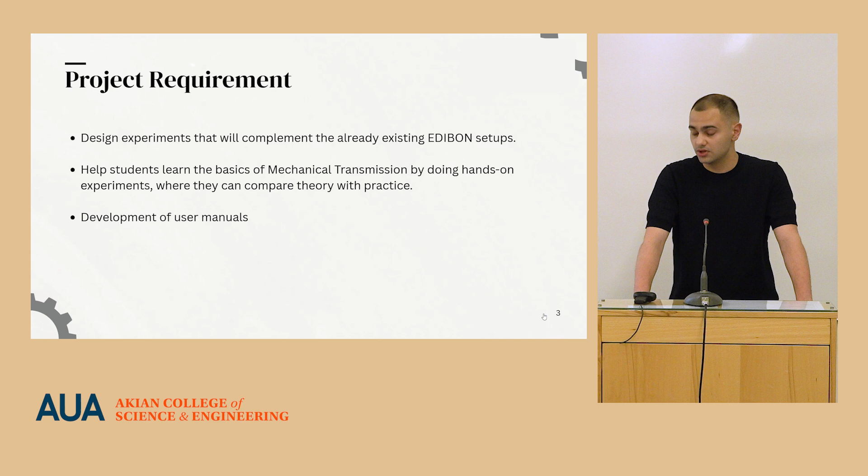The project requirement is to design experiments that will complement the already existing Edibon setup, help students learn the basics of mechanical transmission by doing hands-on experiments where they can compare theory with practice, and also develop user manuals to guide students.

So what is transmission? Mechanical transmission is a system that transfers power from an input source, changing its speed, direction, torque, or other things to meet mechanical needs. We are all familiar with them, and one of the best examples is the chain drive of a bicycle that everyone knows.

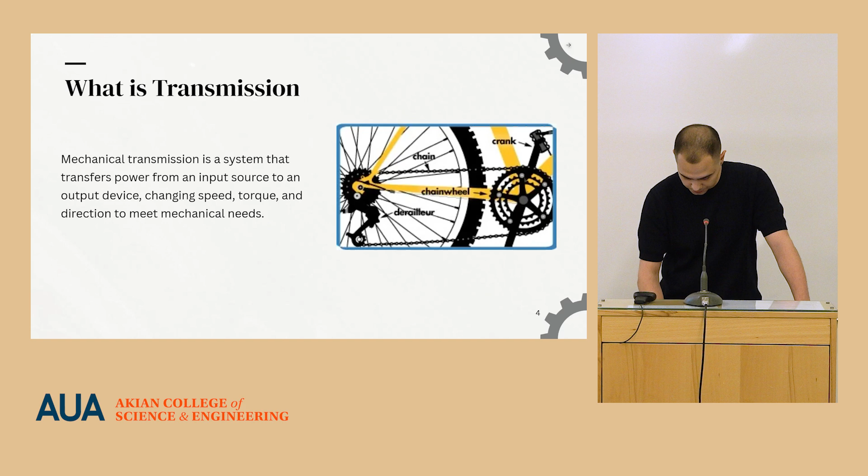Applications: mechanical transmissions are used everywhere, starting from bikes to cars to heavy industrial machinery.

Educational values: academic integration. These setups can be incorporated into different courses throughout the engineering curriculum to learn about every aspect of it. Then enhanced learning through implementation - students can use these designs in their courses to learn how they work, how to design them, not in theory but in practice, and also to prepare students for the rise of robotics.

As we have seen today in some exceptional presentations, the increase in robotics will require many transmission units, and also people who know how they work and how to design them.

Fundamental concepts: the most important ones are speed reduction, which shows by what factor the speed gets reduced, and mechanical advantage, which shows how much the input torque gets increased. In theory, both mechanical advantage and speed reduction are equal, meaning that if the speed gets reduced by a factor of 6, then the mechanical advantage, the input torque, will be multiplied by 6.

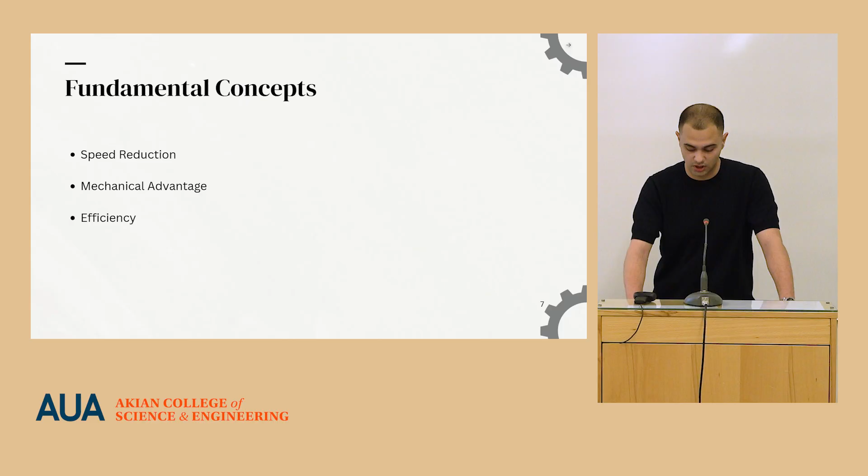But in real life, there are losses due to friction or misalignments, so it is not always the correct value. Efficiency shows how much of that input power actually goes to turning the output shaft rather than being lost in friction or misalignments.

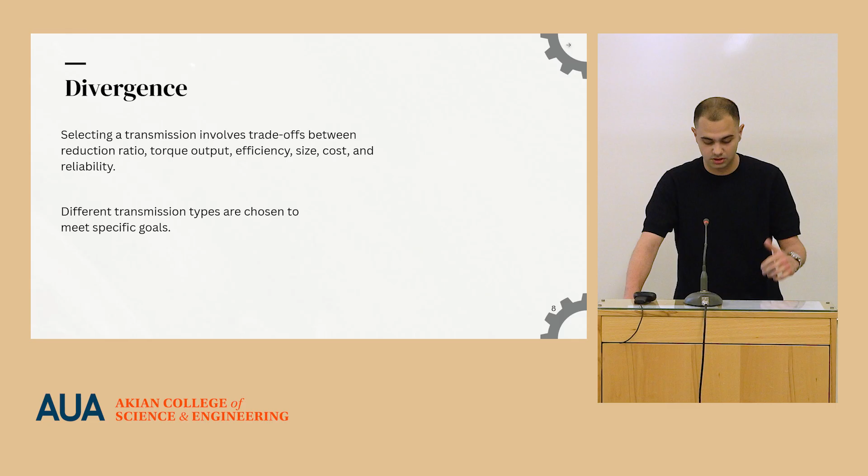Selecting transmission involves trade-offs between reduction ratio, torque output, efficiency, size, and etc., and different transmission units are used in different spaces to meet specific goals. A review of already existing setups from Edibon includes belt drive, chain drive, gears, bevel gears, worm drive, and universal transmissions. Now into the new setup.

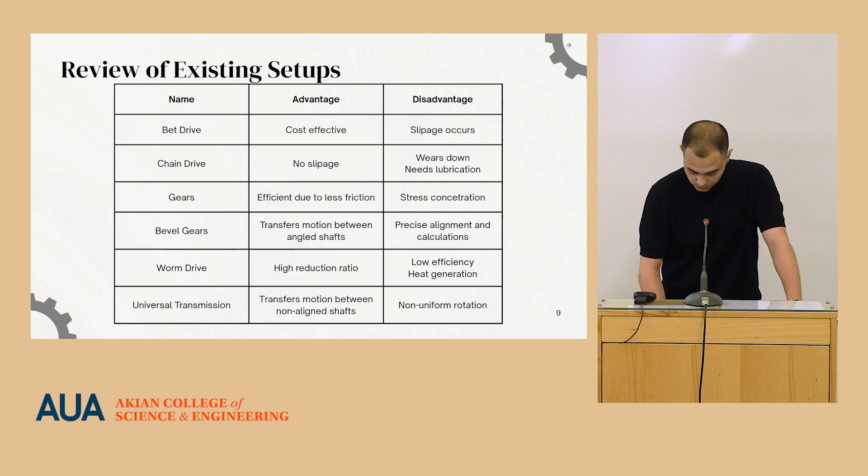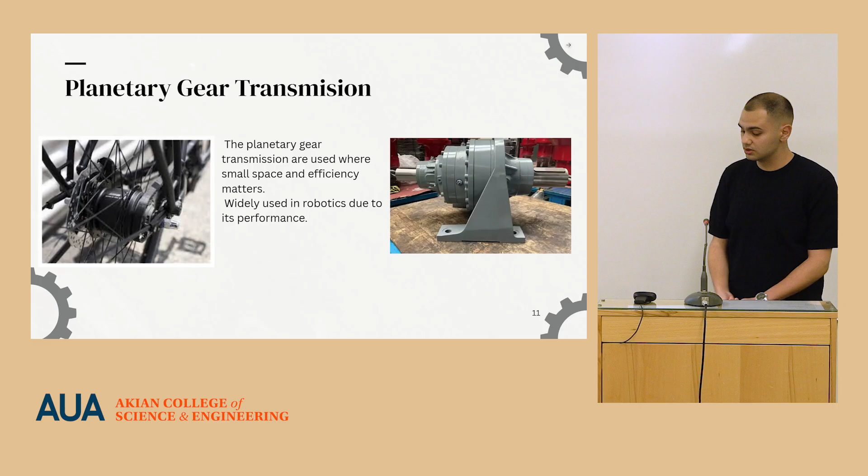The first setup is planetary gear transmission, used everywhere where small space and efficiency matter. On the left you can see a picture of a planetary gear transmission used in a bike, and the other picture is one used in a mining rig.

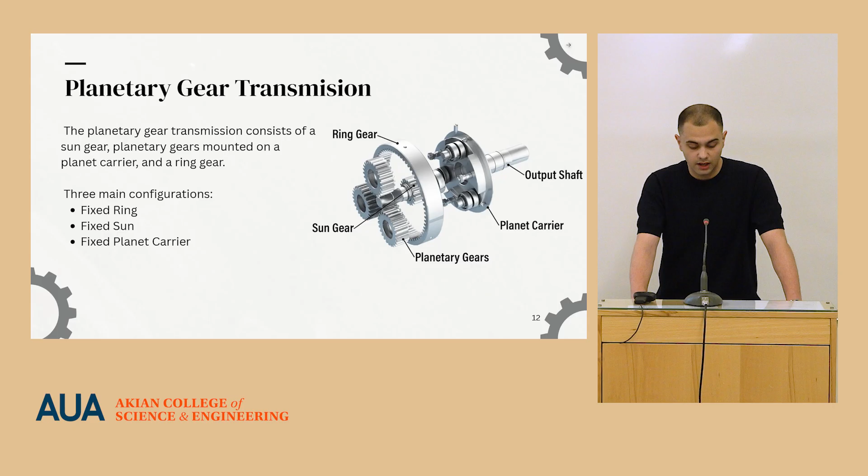They consist of a sun gear, planetary gears mounted on a planet carrier, and a ring gear. There are three main configurations: fixed ring, fixed sun, and fixed planet carrier. In my configuration, I used fixed ring - it's the most used one.

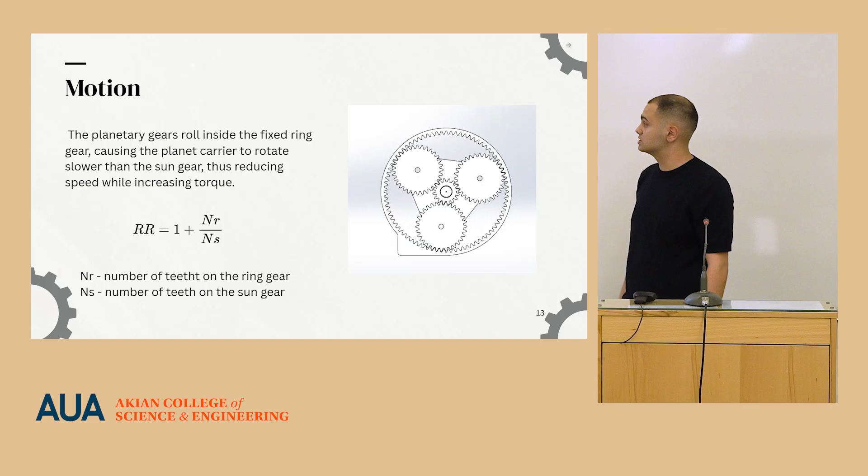Here you can see the motion of a planetary gear transmission. The planetary gears roll inside the fixed ring, causing the planet carrier to rotate slower than the sun gear. In the center, you can see the sun gear, which rotates around its axis. Then you can see three planet gears that not only revolve around their own axis but also around the sun gear - hence the names, sun as it is in the center, and planets as they revolve around it.

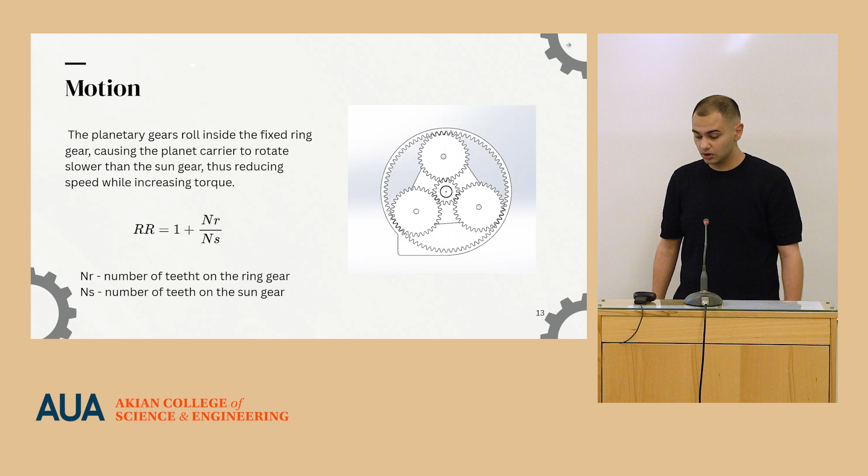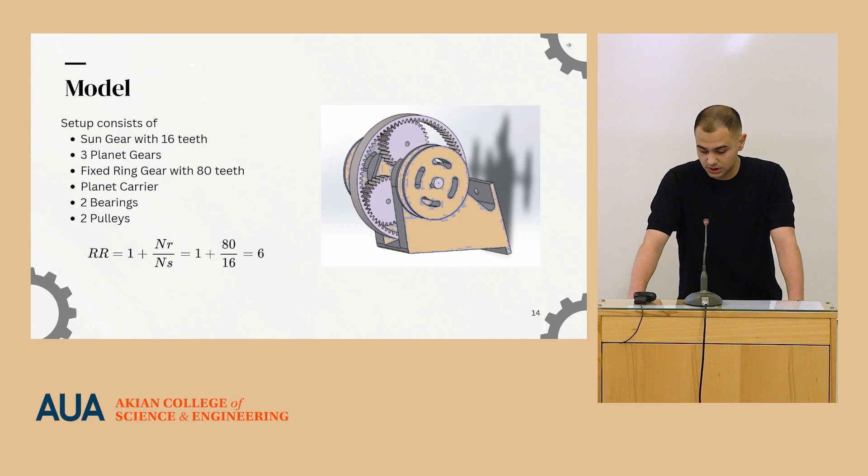There's also a formula for the reduction ratio. My model consists of a sun gear with 16 teeth, 3 planet gears, a fixed ring gear with 80 teeth, a planet carrier, 2 bearings, and 2 pulleys, giving a reduction ratio of 6.

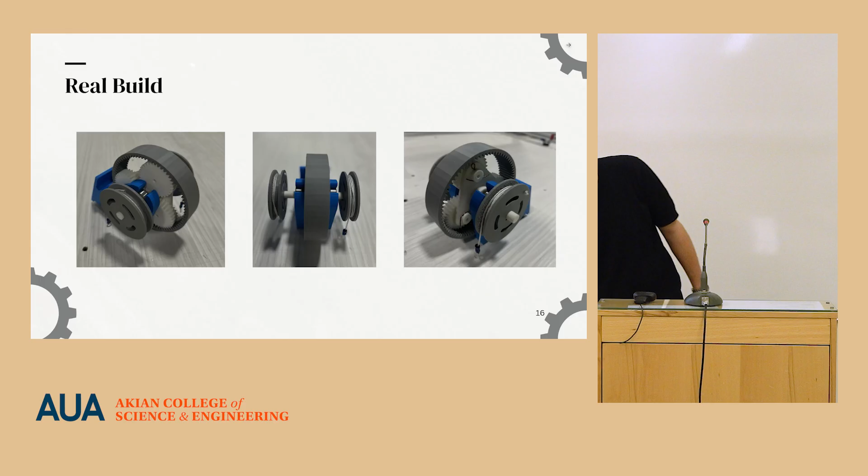So how does the experiment go? There are 2 experiments. The first is clarifying everything - calculating the reduction ratio with a formula, then rotating the input pulley and counting turns of the output pulley. If the reduction ratio is 6, the input pulley must rotate exactly 6 times for the output pulley to rotate exactly once. After clarification, the second experiment is done, which is calculating the efficiency of the planetary gear transmission.

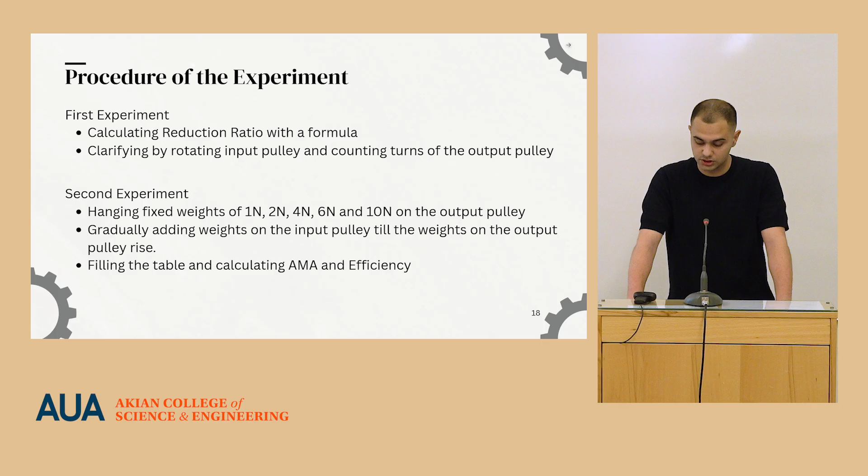This involves hanging fixed weights on the output pulley, then gradually adding weights on the input pulley until the weights on the output pulley rise, then filling in the table and calculating everything. This is how the experiment will go.

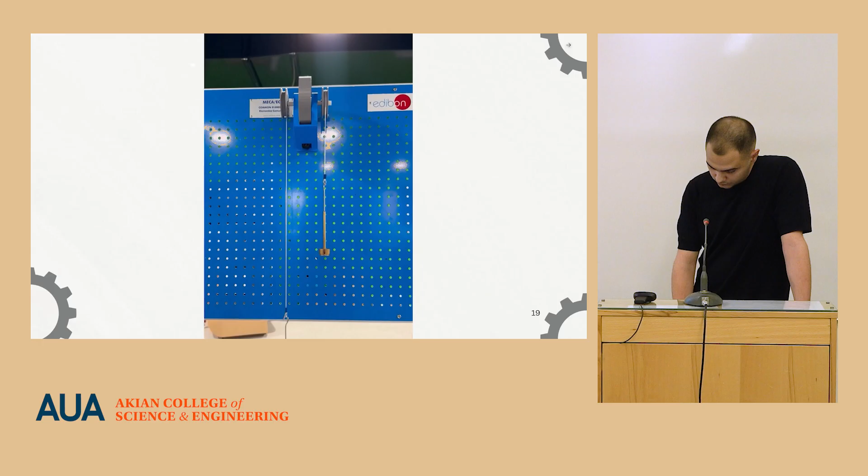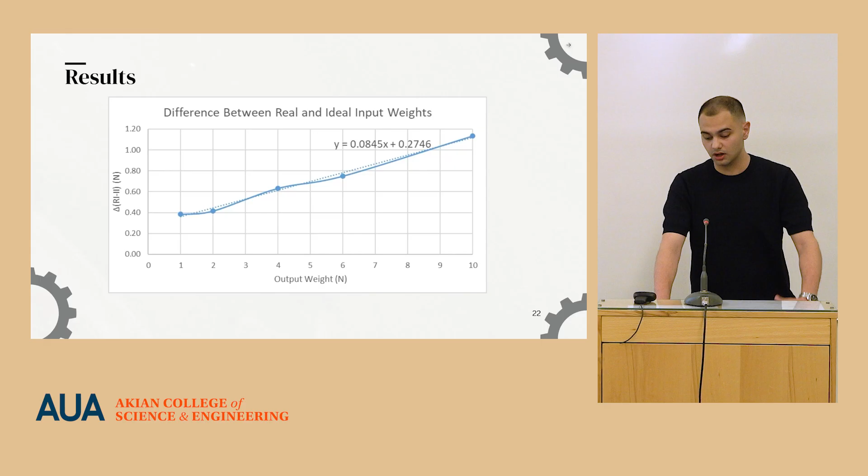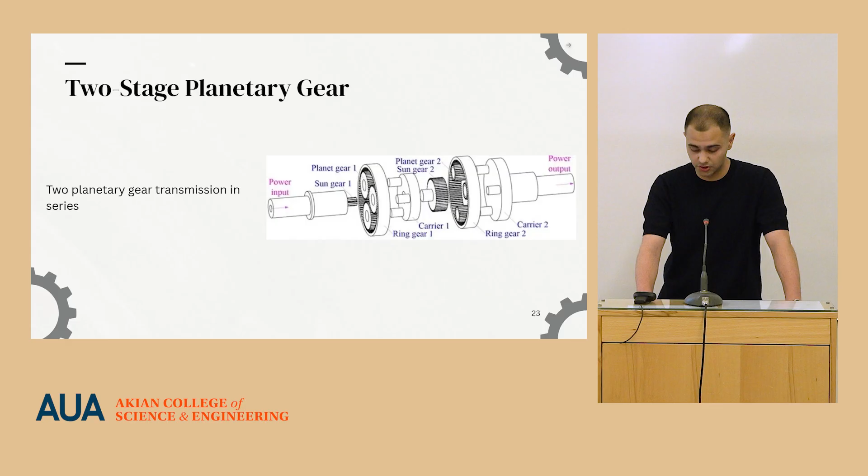But sometimes you don't need that much efficiency, you just require high reduction ratios, and this is achieved by 2-stage planetary gears, as you can see here. It is basically two planetary gear transmissions connected in series. There are two configurations: common ring, and one with separate rings, and the reduction ratio is just the multiplication of each stage.

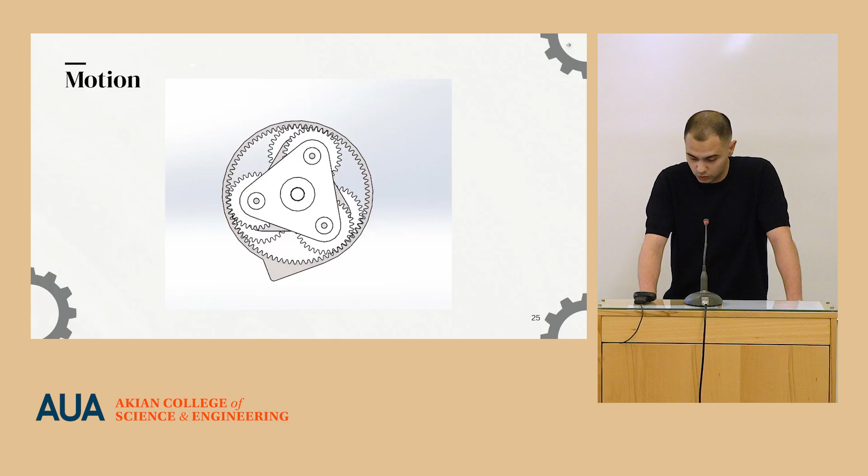Here you can see the motion of a 2-stage planetary gear transmission. At the back you can see relatively fast input, and at the front relatively slow output. And this is the design.

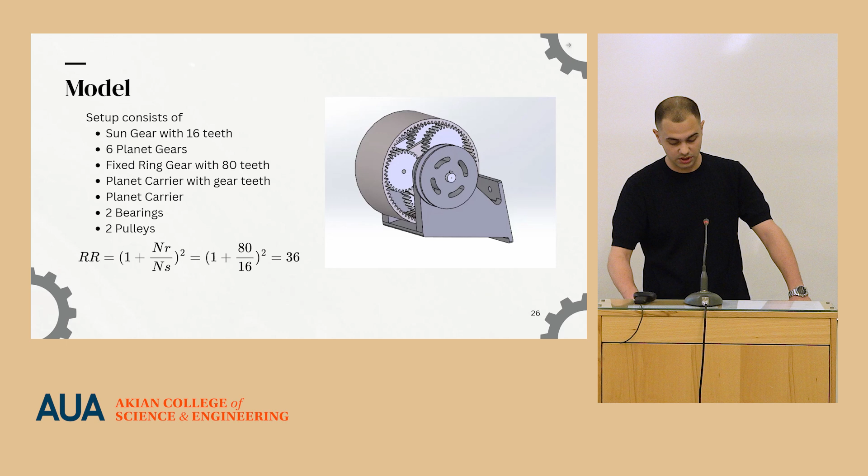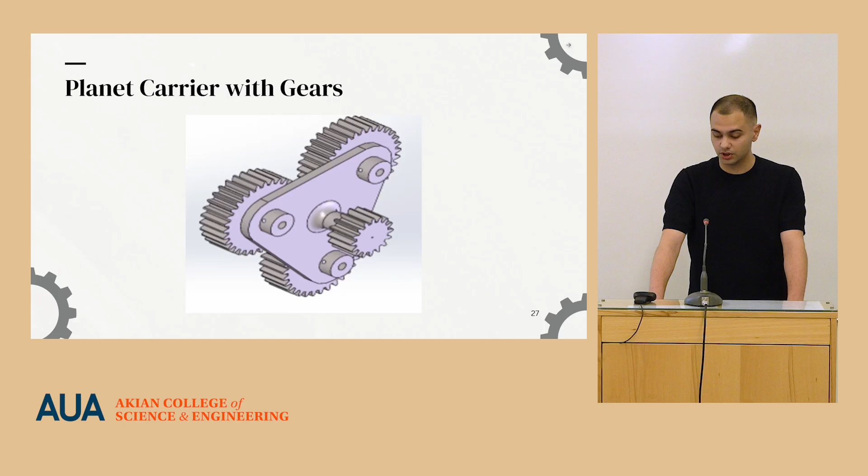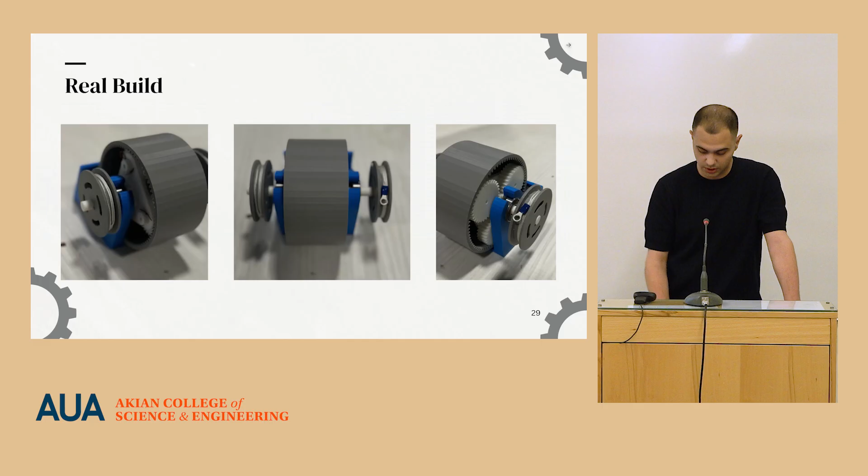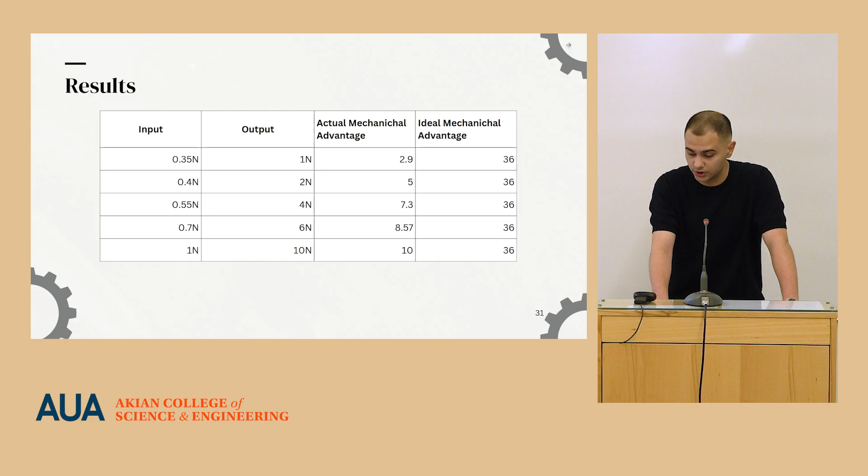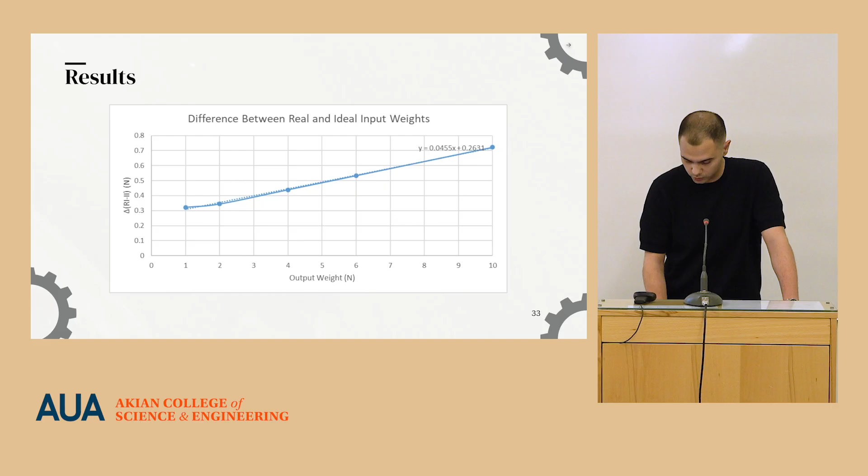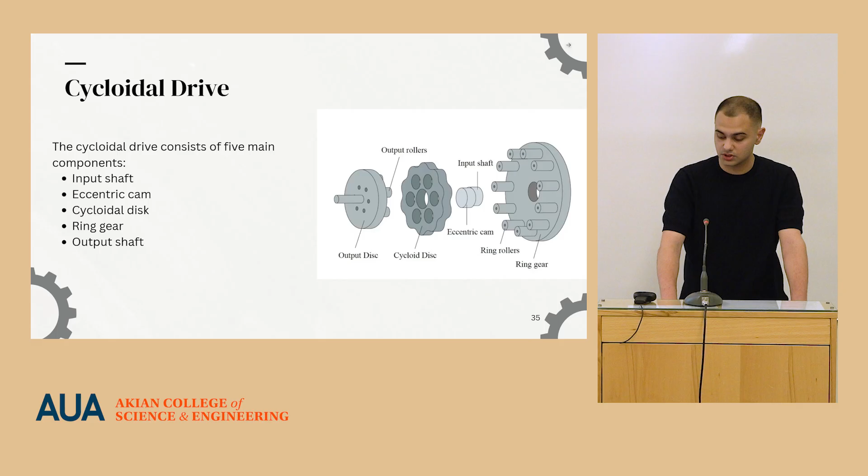Now, the cycloidal drive. Cycloidal drives are used in heavy machinery and robotics due to their compact and relatively good performance. The cycloidal drive consists of 5 main components: input shaft, eccentric cam, cycloidal disc, ring gear, and output shaft. Let's look at the most interesting aspect of this transmission, which is the cycloidal disc.

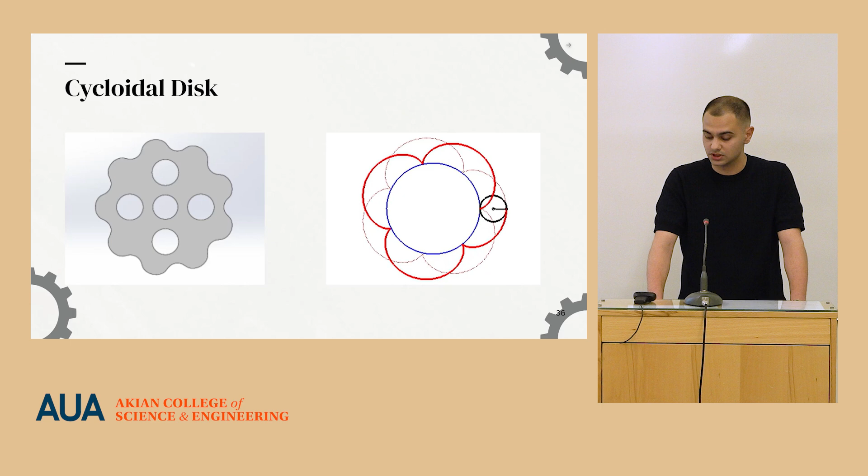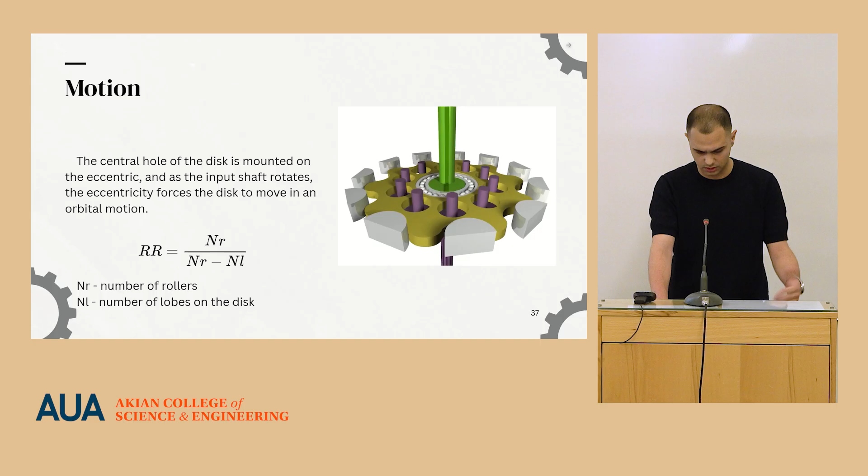The cycloidal disc gets its shape from an epicycloid curve, which is basically a point on the circumference of a circle that revolves around a bigger circle. As the disc is located on an eccentric cam, movement of the cam forces the disc to move in an orbital-like motion.

Here is the reduction ratio. My setup consists of two cycloidal discs with 9 lobes, an input shaft, a casing with 10 rollers, an output shaft, 4 bearings and 2 pulleys, and the reduction ratio is 10.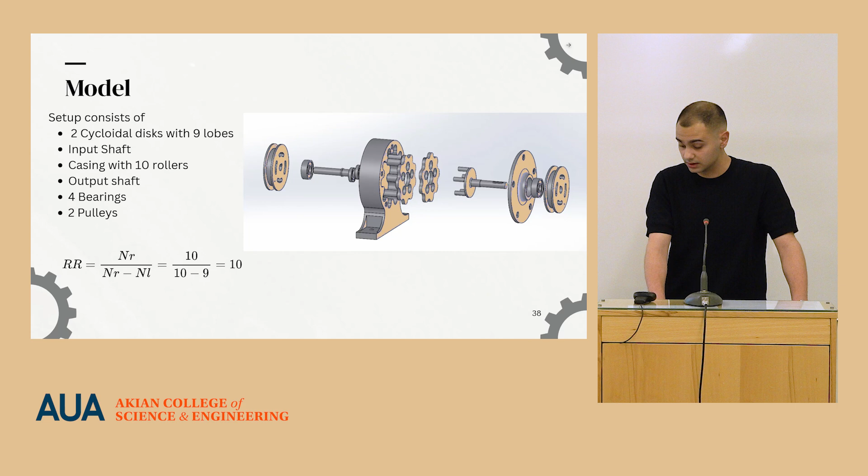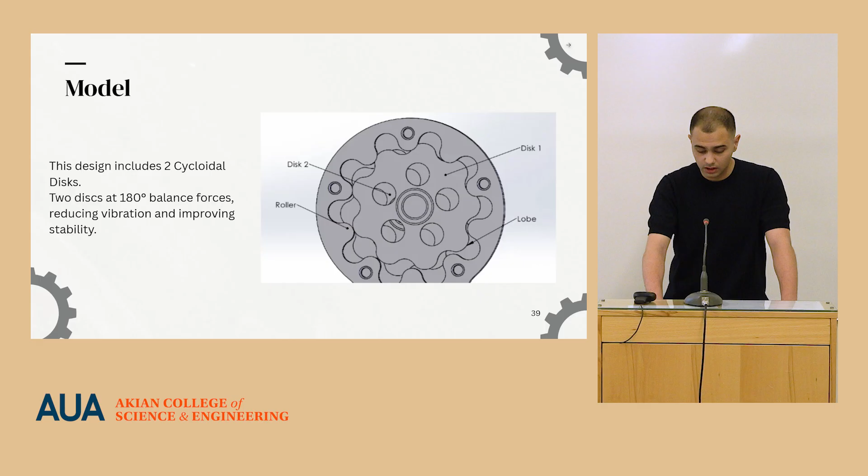As you can see, I use two cycloidal discs. This is because when using a single cycloidal disc, there are a lot of vibrations in the system that reduce reliability of the drive overall. When two discs are placed 180 degrees apart, the forces cancel out, reducing vibration and improving the overall reliability of the drive.

Here you can see the real build, and also the ideal case simulation that we did. The negative sign on the output just shows that the output revolves in the opposite direction to the input.

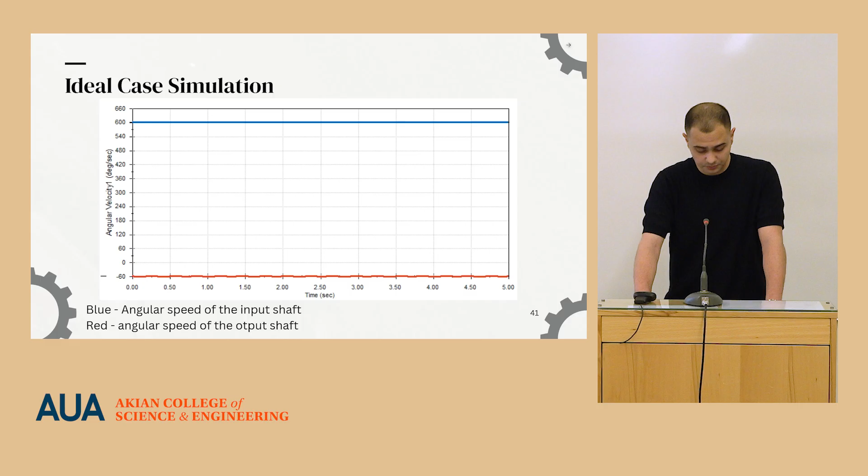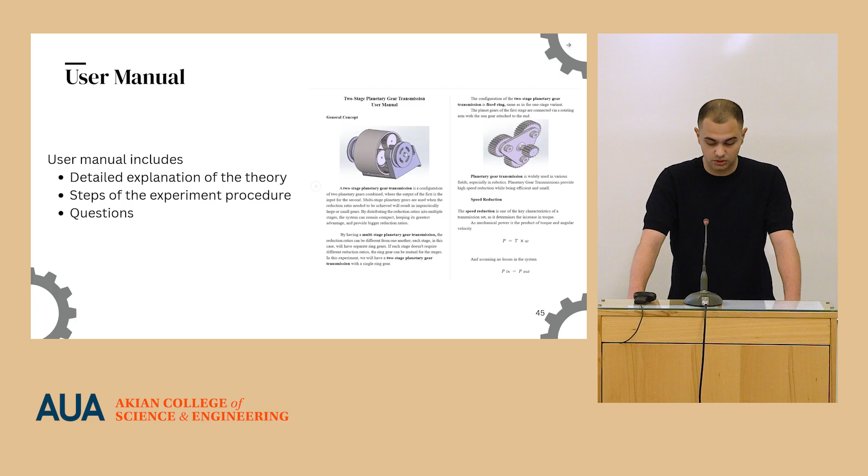To conclude, I would also like to acknowledge a few people. First and foremost, Professor Sarkis Zeytunyan, for being an exceptional capstone supervisor and for his constant guidance, support, and belief. Arman Asatryan, for always being ready to help and share his experience with me. Mariam, our TA, for guiding and supporting us through the capstone project, and my course mates and friends for amazing four years in the university. Thank you.

Did you consider putting this in a cutout model? I ask because it's an education project, and a cutout model, especially for a more complex model like this, would be helpful.

Yes, the design was made in such a way that students can actually see how the motion is transferred through these cutouts. But the cycloidal drive, as I said, is a different kind of transmission, much more compact, but it also needs a lot of structural rigidity. So I decided to close everything so the structural rigidity is good, and the students will learn and know that it is needed like this.

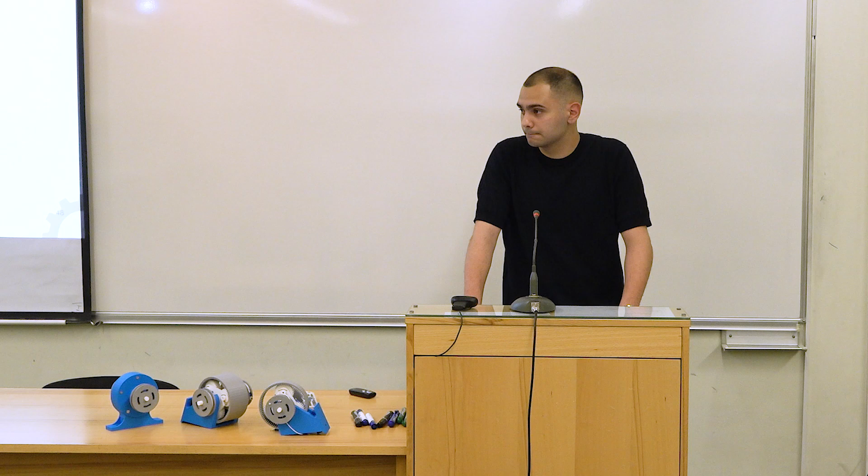And what about the educational materials, the user manuals? No, I mean, it is an educational project for the other students to get involved or get interested.

Yes, this is made so students, as I said, robotics is getting much more involved into machinery and overall our life, and there is a high need for people who know how to design and calculate everything about the transmission. So the need can be filled, and this, with also the Edibon setup, will fill that gap for the people who actually learn.

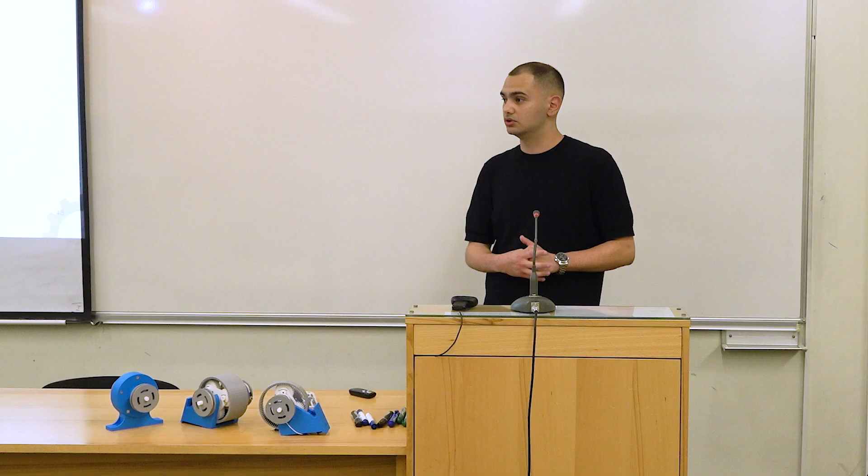Students will, as these components, these drives can be integrated into different courses to learn how they model. For instance, they can be incorporated into CAD to learn how to model dynamics and how their motion works, and also, for instance, into mechatronics to learn how to implement them.

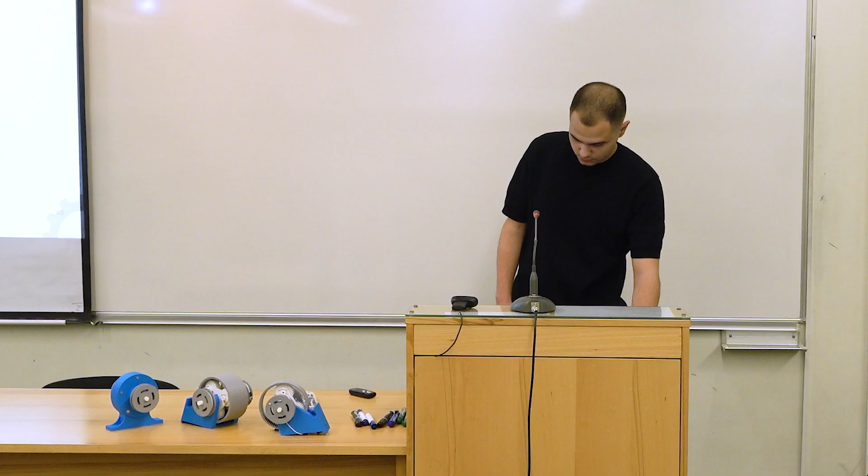Comment from my supervisor: I just want to mention very consistent, very good work from him. And I want to mention that he was just a kind of emergency person in the lab, and the majority of students who presented here on prototyping and design related projects, I think in their acknowledgements should have also mentioned Mher Baburyan. He is a volunteer proctor in our lab.